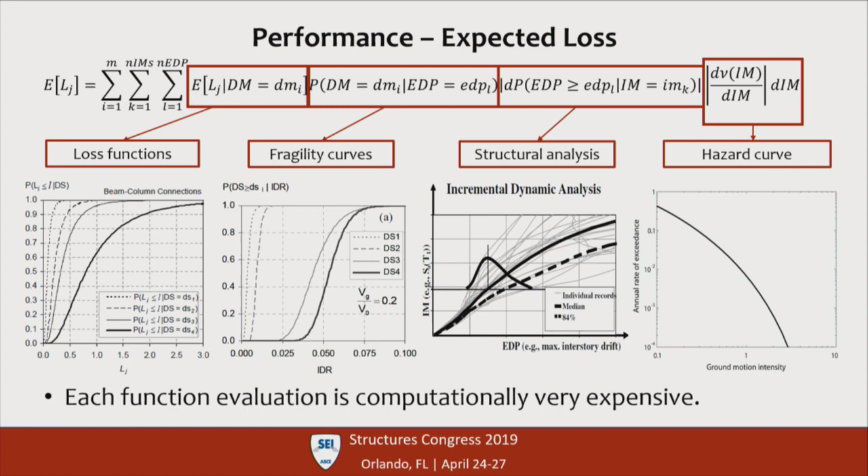So, in order to solve a single objective optimization problem, the engineer could limit the expected losses, or constrain them to allowable values, and minimize the initial cost. And he would get an optimized solution. He would probably get a medal from the client. His boss will not be happy for him wasting time on optimization.

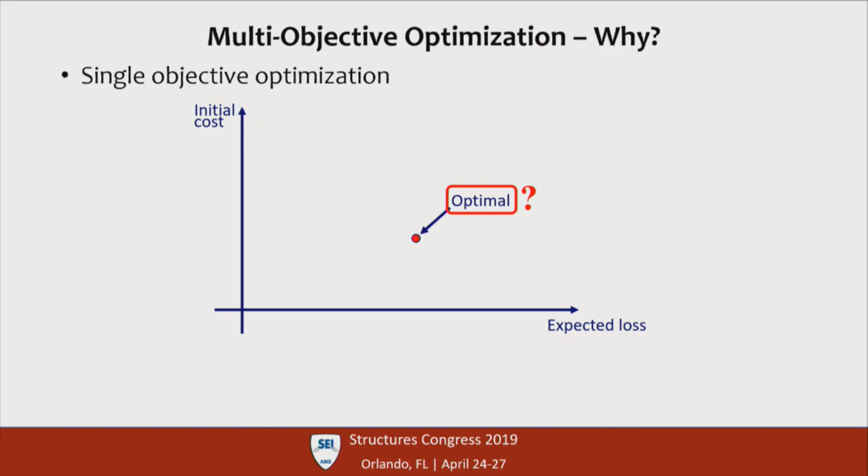But the question is, is this really an optimal or an optimized design? And the answer is yes, for the problem that the engineer solved, this is an optimized design. But what would have happened if the engineer was willing to compromise a little bit on the expected losses and re-optimized the structure? In this case, he would get a new optimal design, and it could be that with a small compromise in the expected loss, he would get a much smaller initial cost. And he doesn't see that because some parameters, like the allowable expected loss, were set a priori.

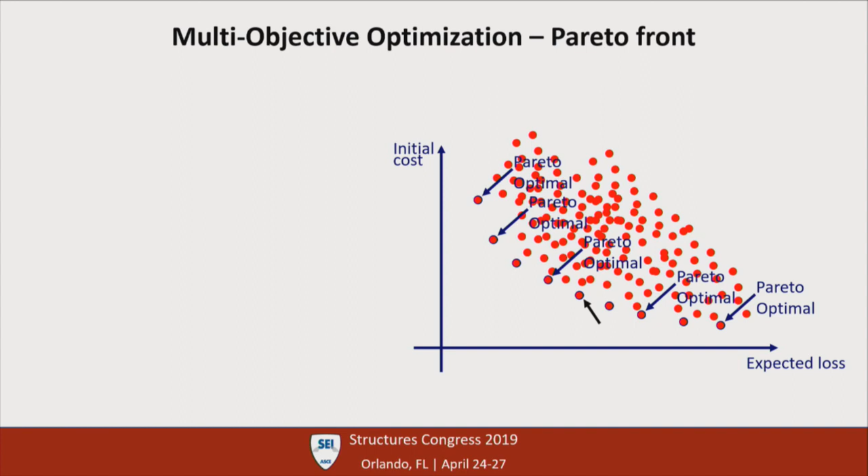And here Pareto comes to the rescue. So if we look at all the feasible solutions on the design space, and we take a look at this specific solution, this is a Pareto optimal solution, since there is no other solution that would reduce one objective without increasing the other, meaning there is no other solution in this shaded quadrant. And the set of Pareto optimal solutions - there is no one optimal solution, but a set of them - is called the Pareto front or the Pareto set.

And when the decision maker has this at hand, he has the whole picture at hand, he can make the best compromise without setting any parameters a priori. So this is a very good tool for decision makers, but it usually involves a very large computational effort. So again, our approach tries to minimize this computational effort so that we could obtain this Pareto front in a reasonable time.

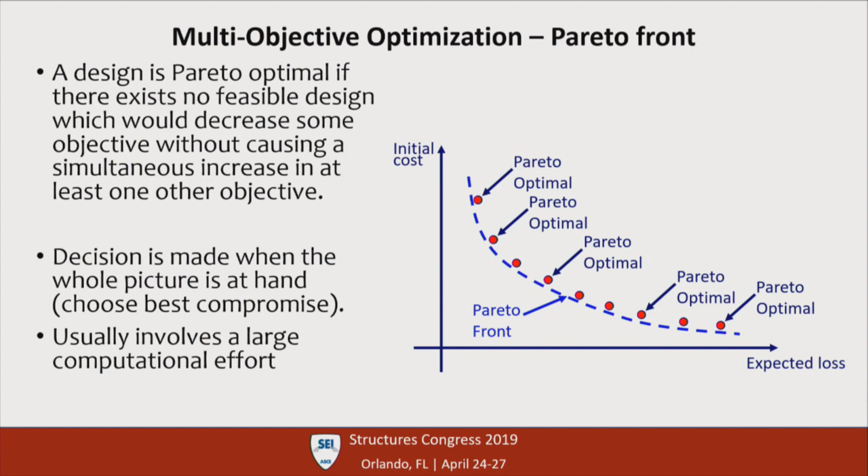So our approach, essentially, we adopted a gradient-based multi-objective optimization approach that was proposed by Izui et al. in 2014. And for the complex functions that we have, we actually use the adjoint analytical method to derive the gradients necessary, and it resulted in a very efficient approach for this specific problem.

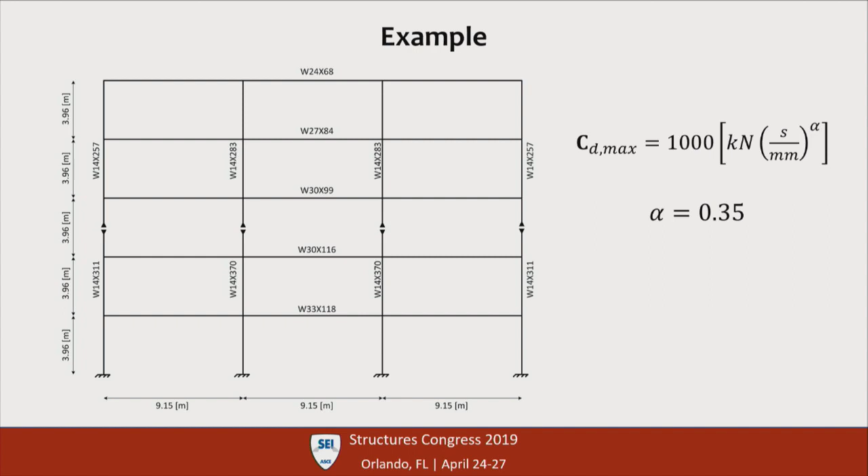So let's take a look at some results. Here we can see a 5-story, 3-bay frame that we wish to retrofit with viscous dampers. We allow dampers to be mounted on the central bay, one in each story or a few in each story. The exponent was taken as 0.35 and the maximum damping coefficient as 1,000 with the appropriate units.

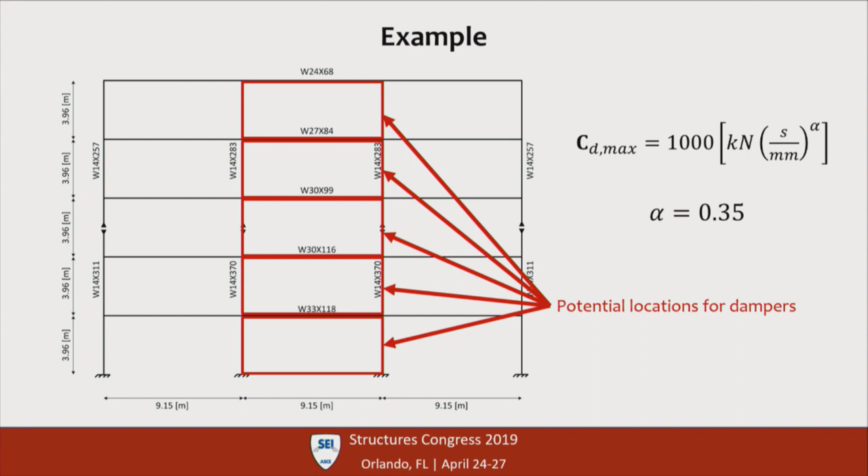And we ran the optimization and we got this Pareto front, and we will take a look at 6 different points on this Pareto front. So the first point, we can see that there is no initial cost, meaning we didn't put any dampers, and there's a relatively large expected loss. On the figures on the right, you can see the damping distribution along the height - zero damping in this case - and the loss per story. We can also see the probability of collapse that is relatively high.

On the figure below, we can see that for the second point, we have a large damper on the 3rd story, and the loss per story is substantially smaller. Note in these figures and in the next figures that the damping distribution between the different points on the Pareto front are very different one from the other.

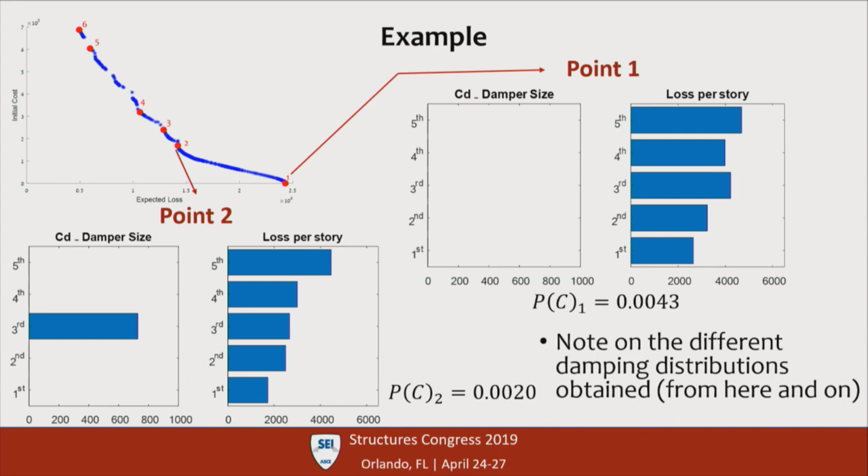So to conclude, we believe that we formulated a meaningful and very good optimization problem for decision makers, because we use multi-objective optimization with functions that decision makers who may not be engineers can well understand, and they can make decisions based on those. Behind this Pareto front, there are actual designs for the dampers. And we did it within a computationally efficient approach.

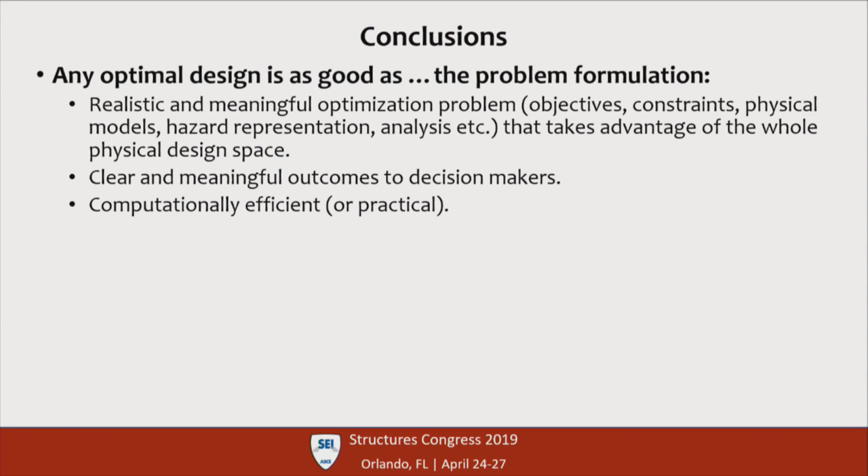One more thing, I would like to acknowledge the Israeli Ministry of Science and Construction for funding this research through the National Building Research Institute. That's it. Thank you very much.

Thank you for having me here. I hope you enjoy it. This is... no, this is not my presentation. This is Ed De Paulo. Would you want to step up?

Can we please change to the optimal design and reinforced concrete structures, please? Okay, this is my presentation. Eugene Kim, who is here, was the associate partner in charge of this project that I'm going to showcase, and Nicolas Gomez was an engineer that helped.

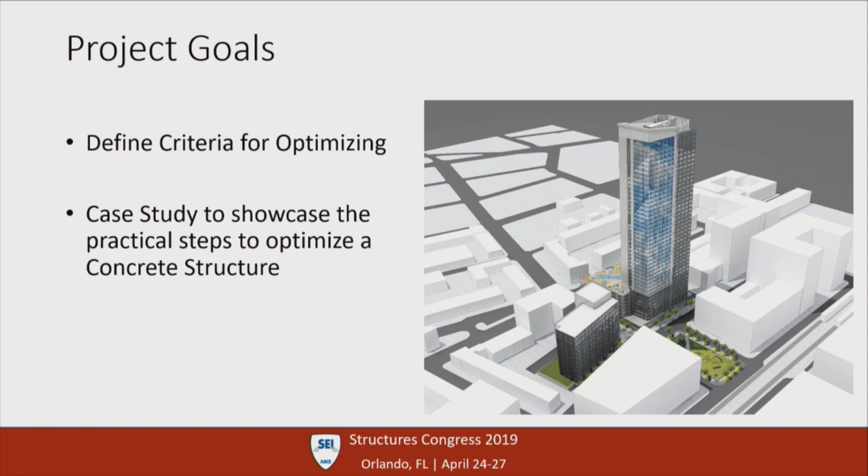We heard a lot about the important thing being to know what we want to optimize, and I couldn't agree more. We're going to talk about the criteria in building design, and then we'll do a case study. What is optimization? We all have an intuitive knowledge of what optimization is, and we all have an intuitive knowledge of what an optimality criteria is. It's the criteria where we judge if we had optimized or not.

In construction, there are 3 basic stakeholders: the owner, the contractor, and the design team. Further, the design team is composed of a number of people: the architect, the mechanical engineer, the foundation engineer, and the structural engineer. And we have nothing in common. The only thing we have in common is we want to get the project built. We want to make it safe, and hopefully sustainable. And then the rest, we're all on our own, with different objectives. The owner wants money, the contractor wants to be familiar with what they built, the architect has to meet the program, and the structural engineer generally is focused on economy.

And this is not new. This has been around forever. This dichotomy in architecture comes from before Christ.

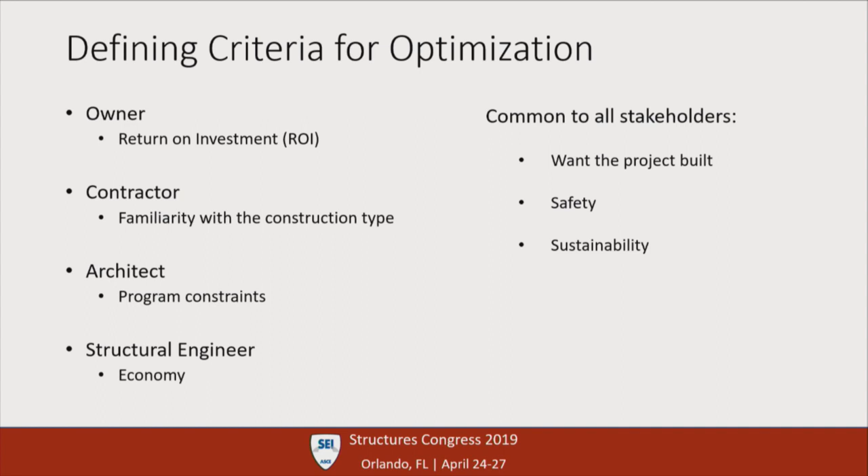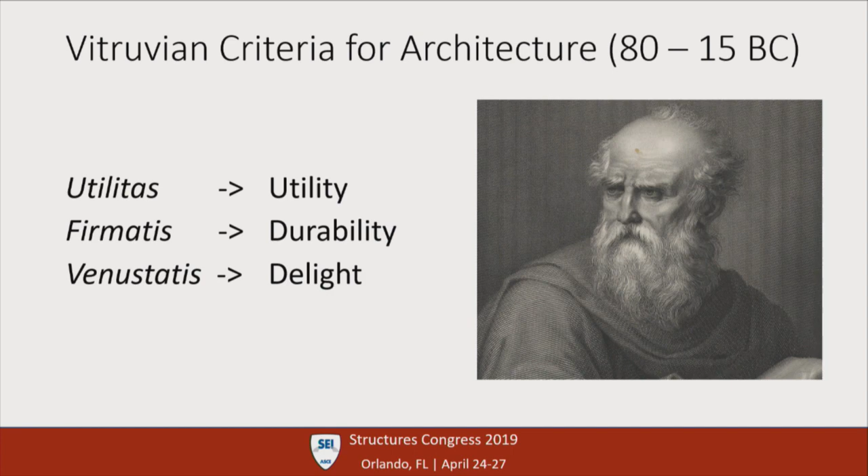How do we optimize the structure? As structural engineers, I think the most important thing is to select the structural system and the material. Once you know what material you want to work in and what the structural system is, you have to work on the different layouts that have a number of components. Then you find what the material strength is, and at the end, we work on the member sizing.

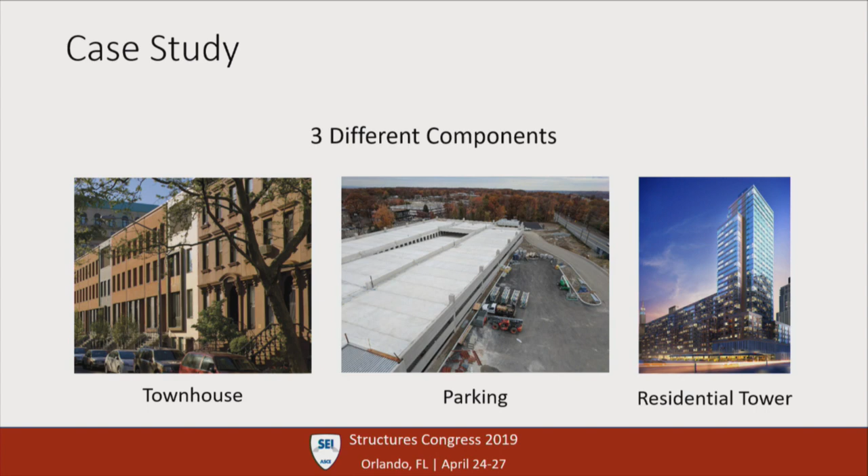In this case study that I'm going to show you, there were 3 different buildings: a townhouse component, a parking component, and a residential component that was a rental. The owner, the contractor, and the owner representative were very experienced; they had done this several times before. They knew that for the townhouses, the best system for them was the Hambro, for the parking it was the precast garage, and for the residential tower it was the concrete flat plate. They knew it because they had the numbers on their return on investment.

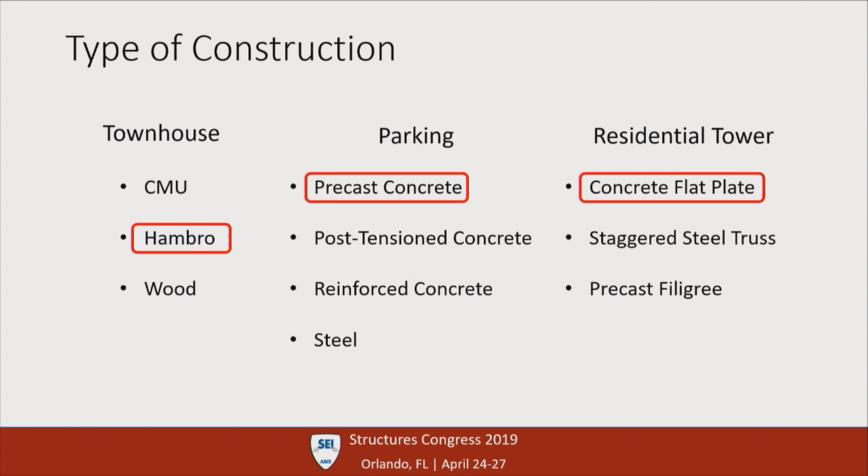So there were 3 different buildings put together on one site, and the massing was something like this. It was nearly a city block, 200 by 200, and this was going to be 480 feet tall — that's to the last floor, not the top of the roof. So it's very short floor-to-floor heights. It's a big project, 670,000 square feet.

This was the most important decision, and it took months: the decision to make all the project in one material only, to make it all in concrete, to have one contractor that will work in concrete so you could give them a huge contract for a better price, so the site could have better logistics, less mobilization, and fewer contractors. This was the hard decision.

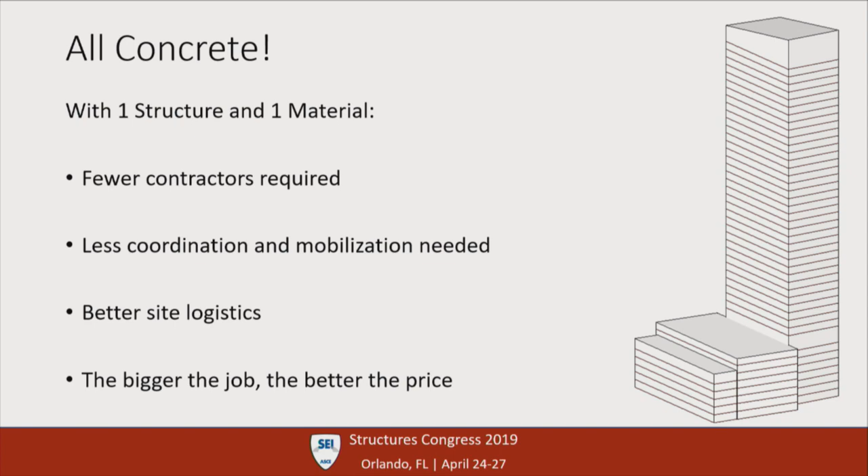The team did not start here. So we did it with one building, without joints. We had to put in fire separation, and we did it with one structure. Just by joining the structures, we saved on the lateral system of the lower buildings. The lower buildings can be supported by the taller building, or if we want to put a lot of structure on the lower buildings, they can actually act as an outrigger or as a point support for the bigger structure.

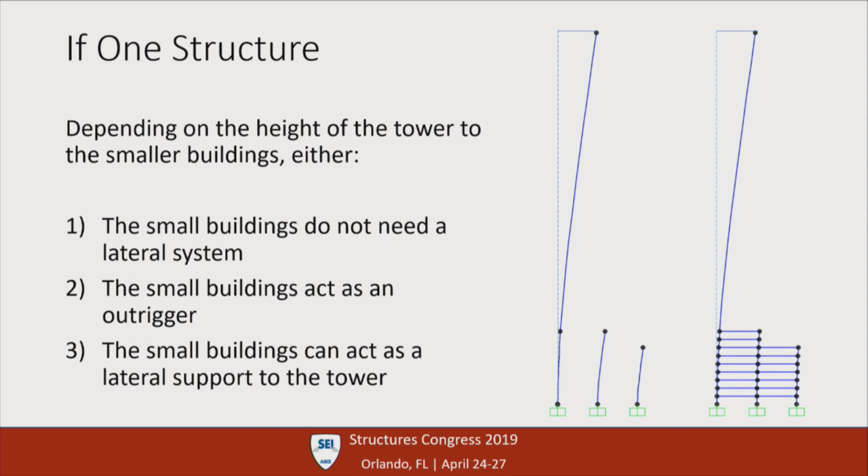The next decision is where do we put the structure? Do we put it on the outside of the tower or on the inside? The external system was rejected. It didn't go with the owner's vision, it was unfamiliar for the contractor, and it impacted the architecture of the apartments. This would have been a very efficient structural system though.

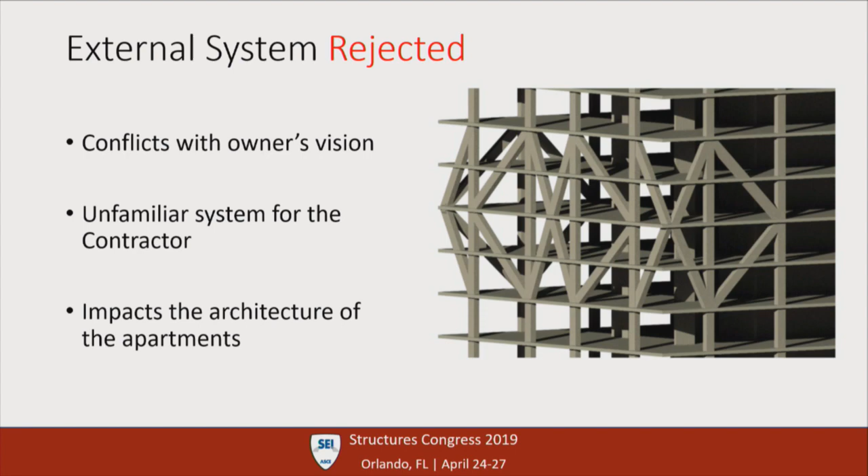So now we go to the wall location. We had a shear wall system. What you see there is that the walls are around the elevators and around the stairs. We want the walls around the stairs in case something happens, so the stair is protected. What is in black is the trash chute. Typically we want walls around the trash chute, but in this case the noise of the trash chute was far away from the bedrooms, so it was not really relevant.

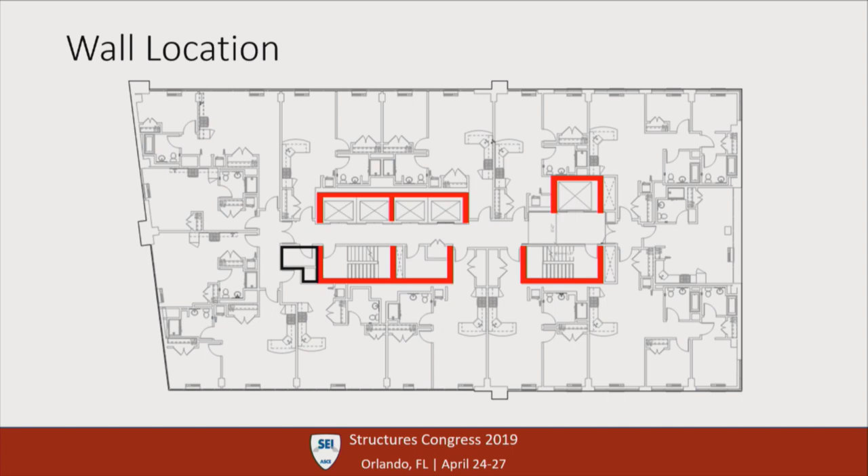Talking to the team, what were the concerns of the team? The concern of the contractor was the link beams. They didn't have a good experience with link beams. They wanted floor plates that were open and accessible to finish the job. The architect wanted as much space as possible for the apartments, and they definitely didn't want noise, and the contractor didn't want to change sizes every 2 floors.

We decided not to put the conduit in the slab. This was a decision of the team. The conduit was put under the slab. This is an example of a link beam of another project.

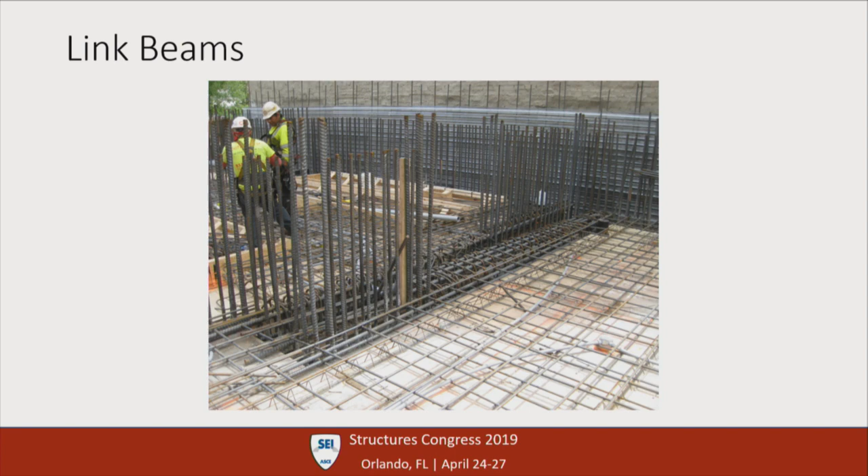The link beams delay the construction and create a lot of coordination problems. What you see on your right is an actual slide of another project, and that's what happened after the mechanical coordination was done. So the link beams many times get very hurt in the process.

So there was a decision that there would be no link beams. Another hit on the structure. This makes the structure more expensive, but the team thought this was an excellent decision.

What you see in blue would be the optimal wall placement if we had walls in the up and down direction of the slide to get some stiffness. But as you can see, the optimal wall placement didn't match the architectural layout. The architectural layout, since this is a rental building, is again based on return on investment. So these were all the possible locations of the walls. In the end, this was the location that was picked, and you can see it's a little bit eccentric, but it has no impact on the architecture.

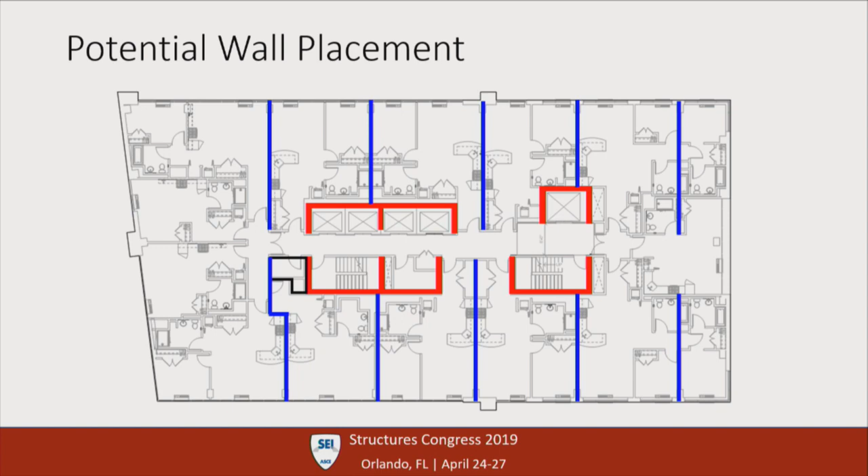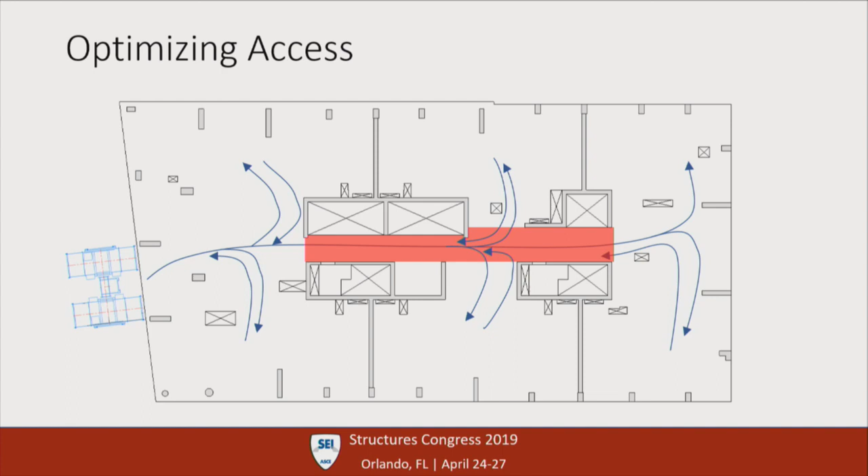The contractor, and what you see there is the hoist, did not want this. They did not want to have all the flow of material for the site go through the center corridor. What they wanted is this. So we designed this: we put staggered holes on the shear walls, so you wouldn't need link beams to give the contractor access to the floor.

The owner was not familiar with this approach. The owner realized he was not getting a break price in the concrete, and he had to pay more to the finisher because now he had to fill in a number of fire-rated walls.

So this was rejected. When you do one of these buildings, what you want to do is increase the tributary area of the core as much as possible, because you have a lot of concrete on the core, and then you reduce the uplift too. So we moved all the columns away from the core, and you can see on your right that some of the columns we made longer to keep with an 8-inch slab. So this was the end result, the tributary area for the core.

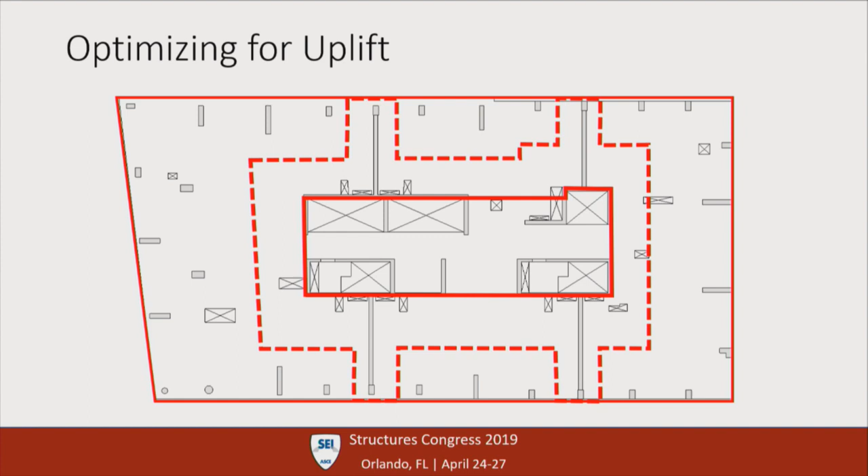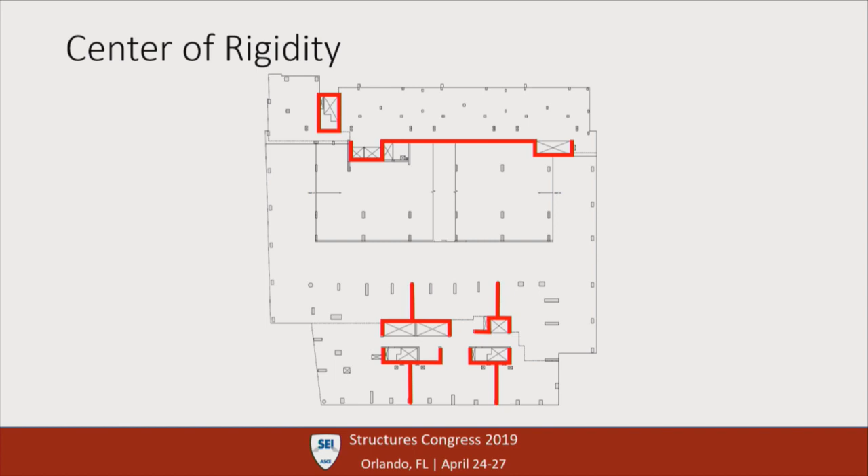Finally, we come up to what we really want to do: control the drift and the period. In lower buildings, we have to satisfy the drift. In taller buildings, what is important is the period, because the period gives you the forces. So this building had a wind tunnel test, and we were trying to optimize the period to reduce the forces.

What Bill LeMessurier saw many years ago is that a structure is optimal whenever you move it around and it contributes to the deflection the same amount. The way to do this is through the principle of virtual works. You have two independent sets of forces and displacements in a building, you compute them, and if the force of one and the displacement of the other equals the internal energy of all the other members, this is very easy to do computationally, and this is the method we use.

In addition, for taller buildings, a disciple of Bill LeMessurier, Richard Henige, found that you can also use virtual work to optimize for the period when the two sets of forces are the inertial forces.

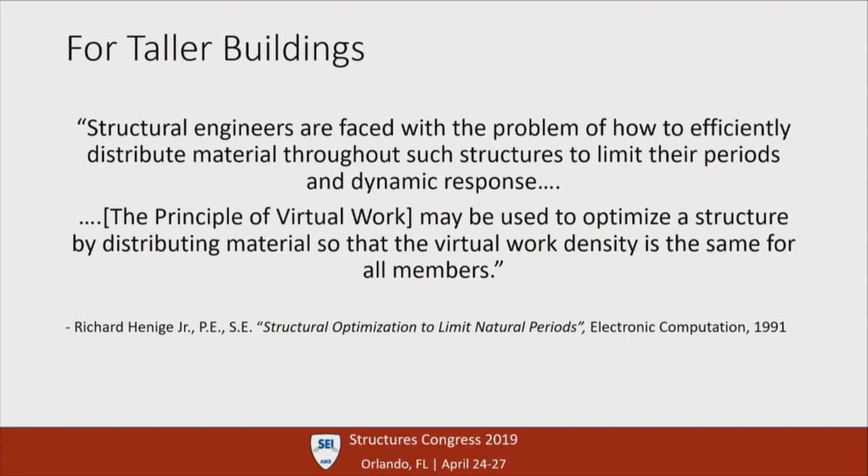So we did the member sizing. We did it with ETABS. ETABS has a routine that asks you for the relative strain energy of all the members, so you can go there, and then you can pick and select the members.

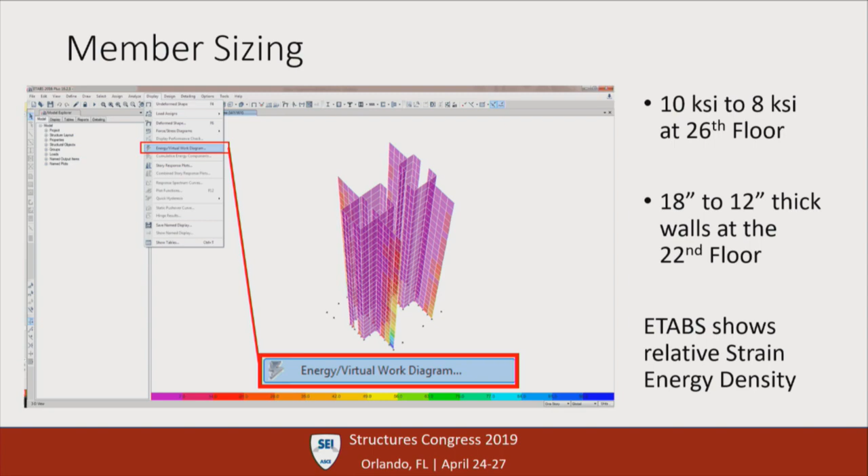This project took 7 months to build. We did a 2-day cycle. This is 2.5 floors a week for 38 floors. The bottom floors, which are 40,000 square feet, take approximately a week. You cannot pour more than 20,000 square feet a day, every 2 days, at least in our experience. So the minimum for the superstructure would be 6 months. This took 7 months, including going through winter and through the holidays.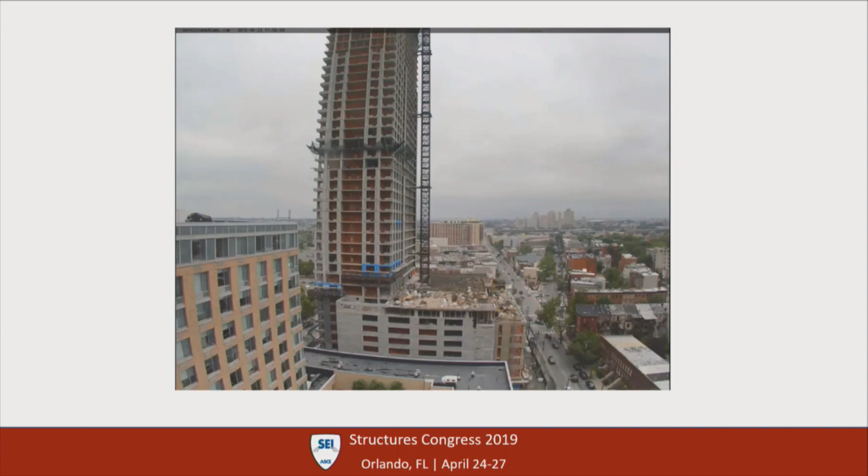We asked for link beams. We didn't have link beams. We asked for the walls of the shear walls to be aligned so they can work. We didn't get that, we got offset walls. The contractor asked for holes. They didn't get that, they got a single hallway.

And finally, we did the column placement and the member sizing. You can see that you have to compromise where you do optimization. It's a team, and what is good for you may not be good for the others.

Listen to the stakeholders. If you remember something about this presentation, this is the most important thing. Thank you.

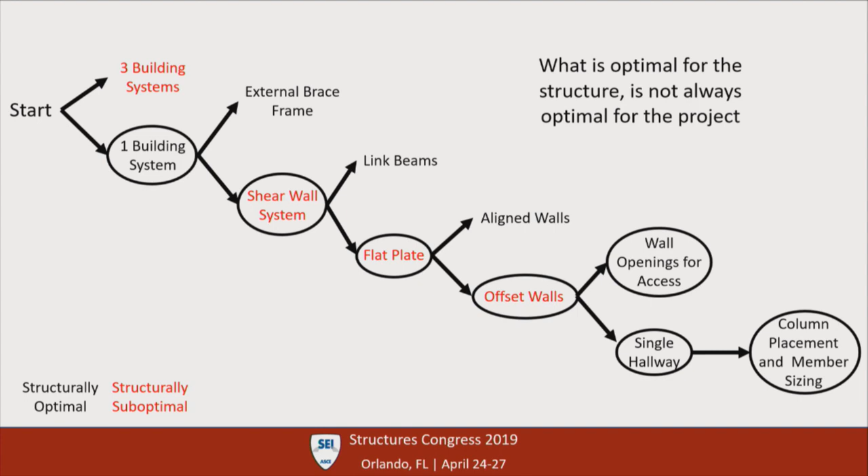You all learned it either in sophomore or junior year of college. It's relatively straightforward: you have a real force system and a virtual force system. The way it works is that the deformation is the sum of P times delta L, where P is axial force, and the M bars times the change in rotations, with those being PL over AE and ML over EI.

You see the bottom equation, number 1: if you use a virtual force of 1, your deformation is the sum of the P P-bar L over AE, and if you have moments, you include M M-bar L over EI, and if you have shears, you can include those, and if it's three-dimensional, you can include MX and MY. You can include as many as you want as long as you take care of them.

What I'm going to show you today, because of limited time, is very simple. It's a braced frame, or it could be used for a truss, but for today, a braced frame. You have to assume all the other optimizations have already taken place. We've decided that you have bracing on these column lines in the building, and you have outriggers and belt trusses at these floors. You have your geometry; I'm not trying to optimize that.

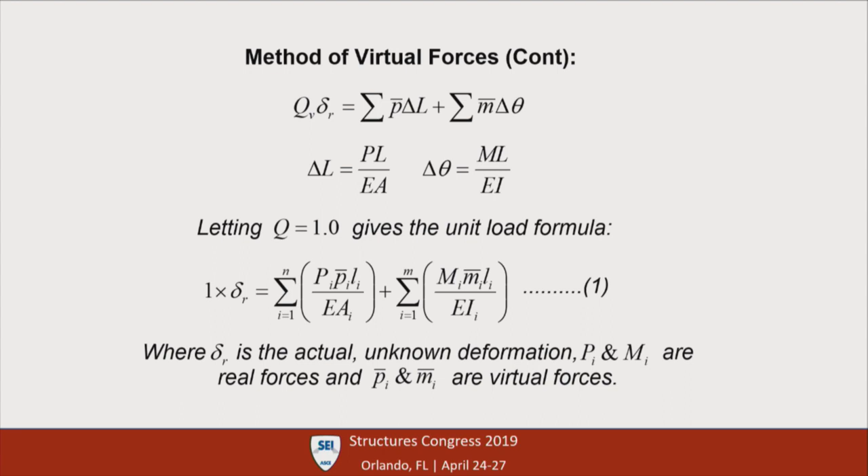We'll call it phi of xy. And you make this equation where capital F is equal to small f plus lambda, which is the Lagrange multiplier. You set the partial derivatives of x and y equal to 0, and you solve for the unknowns. You're going to be pretty amazed at how simple this is.

This works for any number of variables. I'm showing you x, y, z here, but as you can imagine, in a 1,000-foot tall building, every diagonal brace, column, outrigger truss piece is a variable. There's A1 through A2000, and what you want to do is optimize them.

The way we did it in the old days was we did the accounting spreadsheets. We multiplied P, P, L, and divided by E, and we looked in the column to see which ones had the biggest number. That was the biggest contribution of drift to the total answer.

So let's do this. We have the small f function, which is the density times the area times the length. It's basically the volume of the element. And I'm going to add them all together, as many as I have.

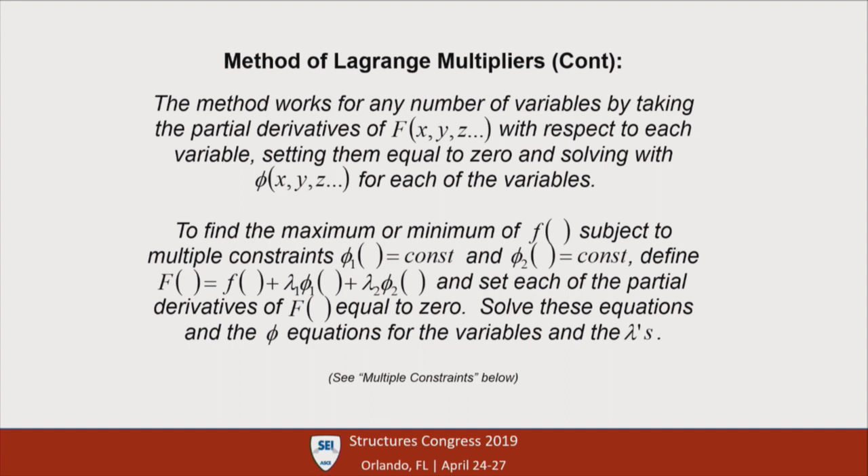The constraint, in this case, is the definition of a displacement at a given point, and that's the virtual force method. The sum of the PPL over AE is equal to some number. It's a constant.

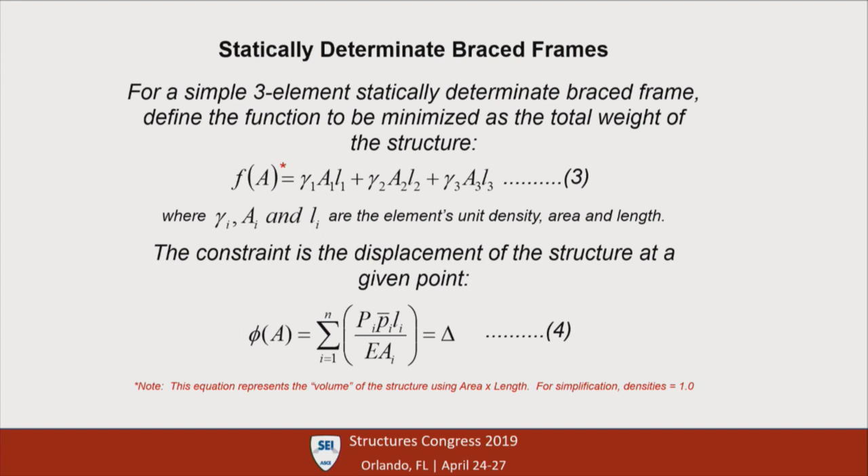And when you fill them all in, you get the capital F equation. Then for an optimized structure, you take the partial differentials of each of the functions in relation to each area. What's important at the bottom, something to remember after the next slide, is that the Lagrange multipliers times the partial differentials has to equal 1.0, or should equal 1.0.

And if you fill in all the numbers - and I'm sure you can somehow get a copy of this PowerPoint, if you want to email me I'll send it to you - you fill in all the numbers, and the bottom equation 6 is it.

The Lagrange multiplier times the PPL over A squared E. The A squared comes because you took a partial derivative in a step before. And that means that the Lagrange multiplier times the strain energy density of the element is equal to 1. When that occurs in every element on the project, you have an optimal structure.

Optimizing, again, volume and hence area. I'm going to do this hand calculation. Very simple, 3-element truss with a 100 kip load on it.

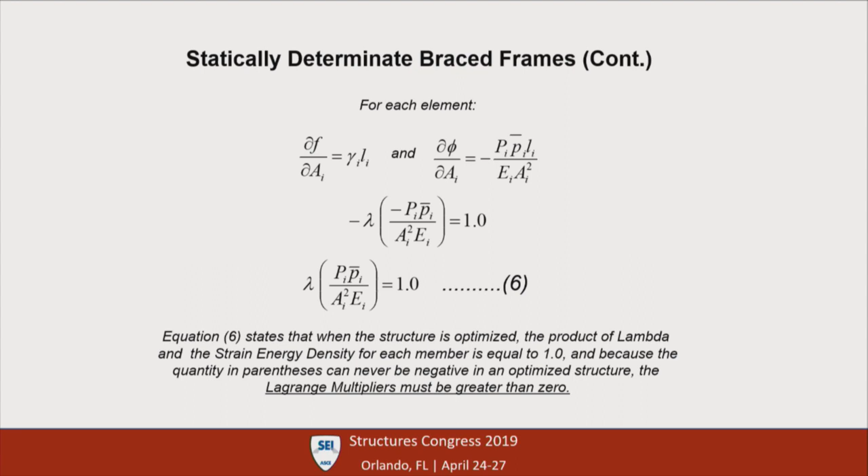You see the dimensions. The Excel spreadsheet printout shows you the P, which is the real load, the virtual load lowercase p, which is based on a 1 kip load, and the length of each element in inches. I plug all that information into the equation that I showed you before for capital F.

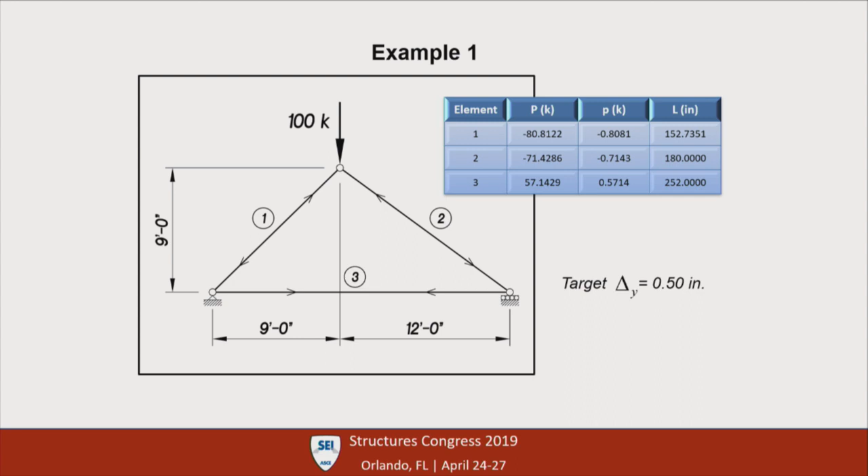And now that's a small little problem that you do by hand with a pencil and a calculator, and very simple to use, right?

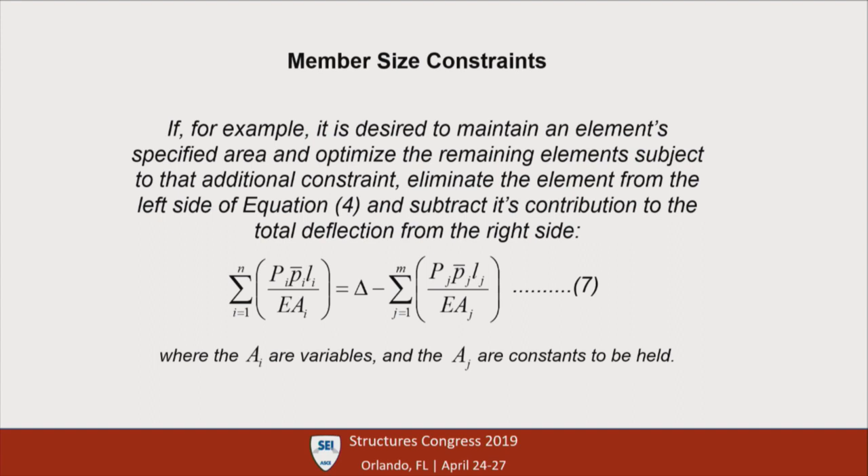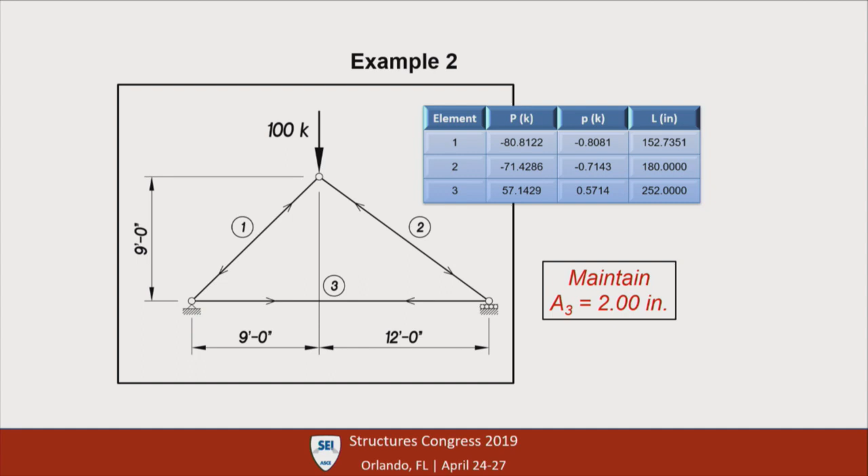So I do it again, and I say in this case I'm going to take A3, hold it constant, and run the same thing. You can see it's the same forces and lengths. I do the same equation, leaving out A3, get my partial differential, and I can relate A2 to A1. I put it in the equation. On the right-hand side, I took the half inch that I wanted and subtract the strain energy contribution from A3. I subtract it from the half inch, and I get the A1 and A2 values across the bottom of the screen. You put them in this spreadsheet, and again, the sum of the third column is half inch, and all the numbers on the optimized elements in the right-hand column are 1.

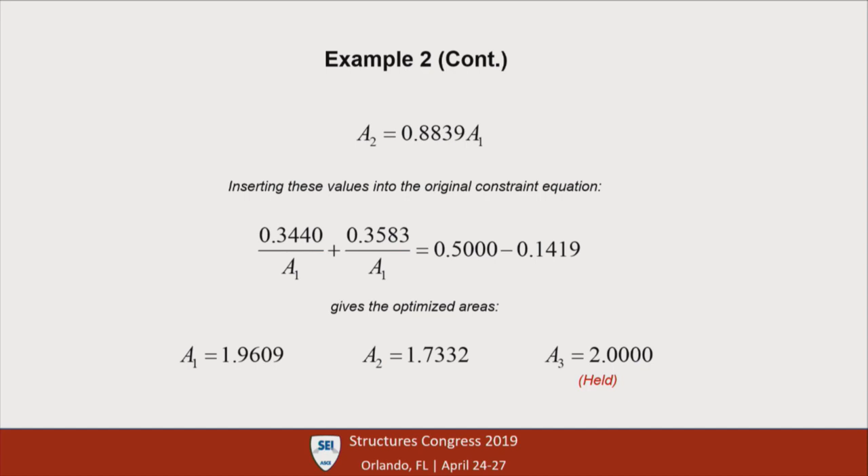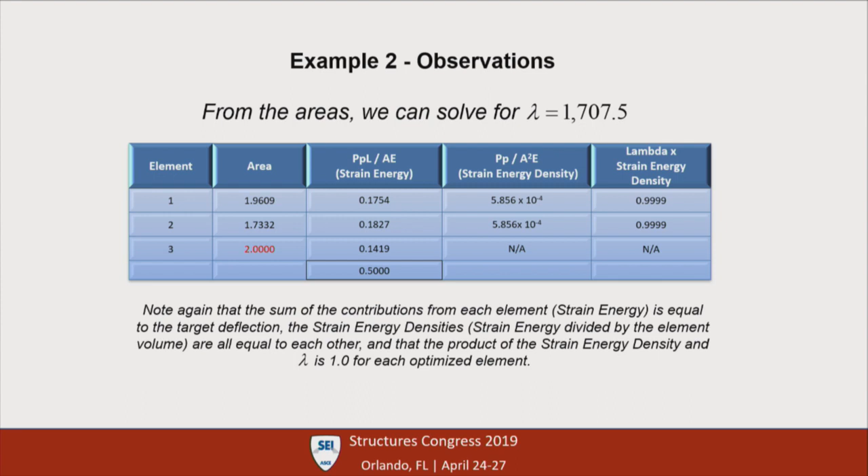Now, I showed you this in very simple terms on a statically determinate frame with axial force. As I said at the beginning, it's valid in 3D. It's valid for moments, it's valid for shears, and it's valid for all of them at the same time. The key is to be able to find a way to relate the moment of inertia to the area. I don't have it in the presentation because of lack of time, but you can go into the steel manual and plot and do a linear regression of every W size in the manual. For W14, you can come up with an equation that relates I to A. It's pretty close, amazingly close. So you substitute I for A times this factor that you work out, and now you can do combined axial and moments.

The last thing I'm going to show you is that for statically indeterminate frames, because I've only shown you statically determinate, the process is exactly the same. But because the forces in an indeterminate system are dependent on the stiffness of the system, as you change the areas around, the forces are going to change. So you necessarily have to iterate. However, using the same method, these are the iterations. The volume of the structure in iteration number 2 hit 186, and in iteration number 3 didn't change, which means, even though this is only a 3-story, 1-bay structure, it converges very, very rapidly. As a matter of fact, those of us who use this in our practices can tell you that if you do it once, even for a 1,000-foot tall building, you're real close to where you want to be, and there really isn't much need to go much more than that.

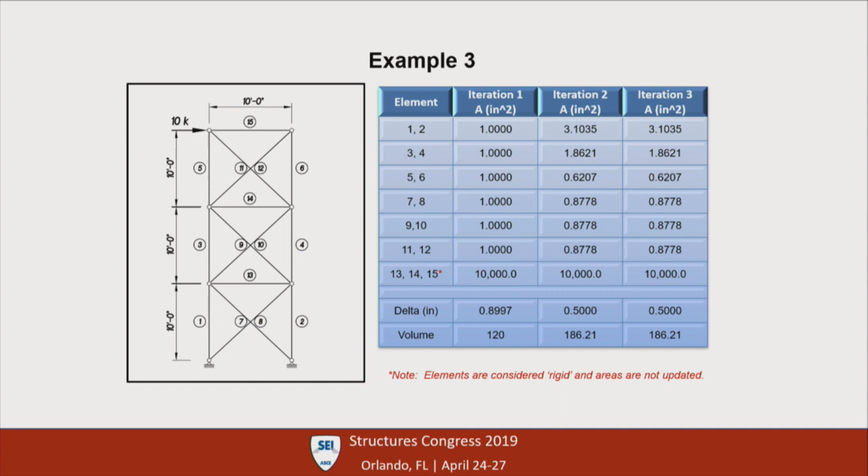Thank you. Hello. Today I will talk about optimization-based design of nonlinear moment-resisting steel frame under seismic load. First, I want to acknowledge the Israeli Ministry of Science, Technology, and Space for the financial support in this research.

So I want to open with a question: how to design? What is the best way to design a new steel moment-resisting frame subjected to seismic load with performance constraint? Using conventional design tools such as force-based design or direct displacement-based design in many cases might lead to inefficient, costly design, in particular when an irregular structure is to be designed. A possible solution we propose for this problem is to utilize the optimization-based design approach for this task.

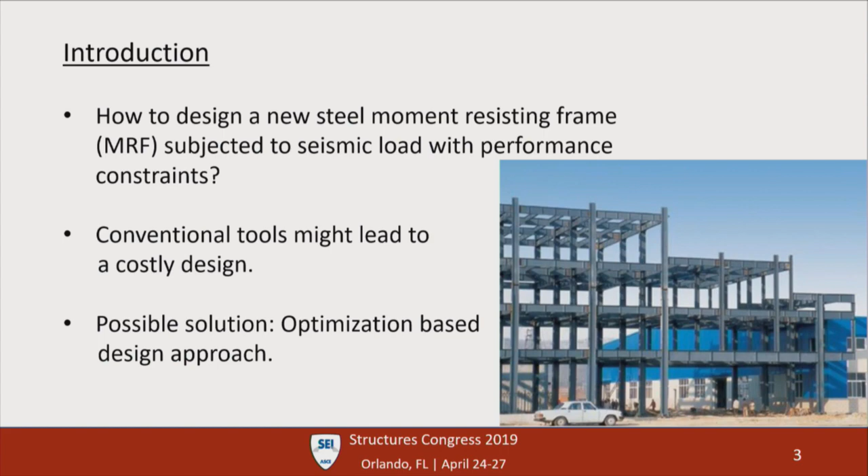In the literature, we can find a number of works that use optimization methods for this problem. Some utilize static nonlinear analysis tools such as pushover analysis. Others use heuristic optimization tools, genetic algorithm, or simulated annealing. Heuristic optimization tools are very popular in the field of structural optimization and can easily be modified for a more reliable analysis tool such as nonlinear time history analysis. But on the other hand, they are very computationally demanding. Also, analysis redesign is used for this problem. Analysis redesign is a very practical and easy-to-use analysis tool, but on the other hand, it's not a formal optimization tool.

In the presented work, we will focus on the gradient-based optimization approach. Gradient-based is known as a very efficient optimization tool. It is a formal optimization tool, and the response of the structure will be evaluated based on nonlinear time history analysis.

The objective of this work is to develop an efficient gradient-based optimization methodology for the design of new steel moment-resisting frames subjected to earthquake with performance constraints. The contribution of this work is that the proposed methodology will be able to solve an irregular, large-scale, real-scale frame with a large number of design variables at reasonable computational cost.

The problem formulation for the optimization process: the objective is to minimize the total volume of material in the structure, in our case the total volume of steel. Then we have the constraints. The first is the performance constraint, the interstory drift, where the peak interstory drift at each story is limited by a predefined allowable interstory drift.

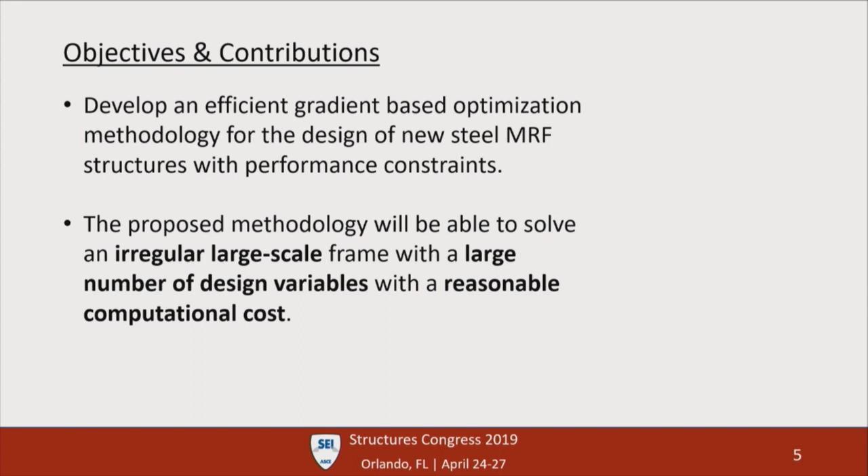We also consider the strong column weak beam and column size criterion. The response of the structure during the earthquake is evaluated based on the solution of the nonlinear equations of motion under the load of an ensemble of ground motion records. The cross-section properties for each member are selected from a standard predefined set of steel tables, where the plastic modulus W represents the cross-section properties.

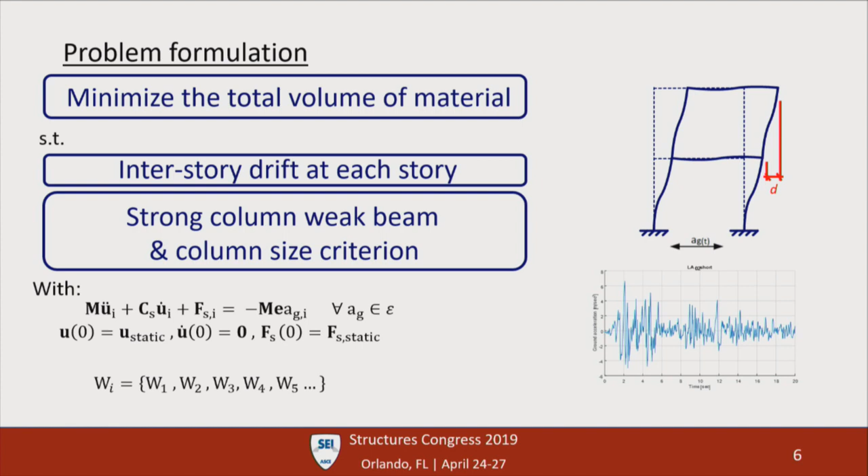The solution scheme for the gradient-based optimization method is as follows. We start from an initial solution, initial design. Then we evaluate the response of the structure, first by a static analysis tool to consider the gravity load, and then we use the nonlinear time history analysis. Next, we evaluate the sensitivities of the objective function and the constraints with respect to the design variables.

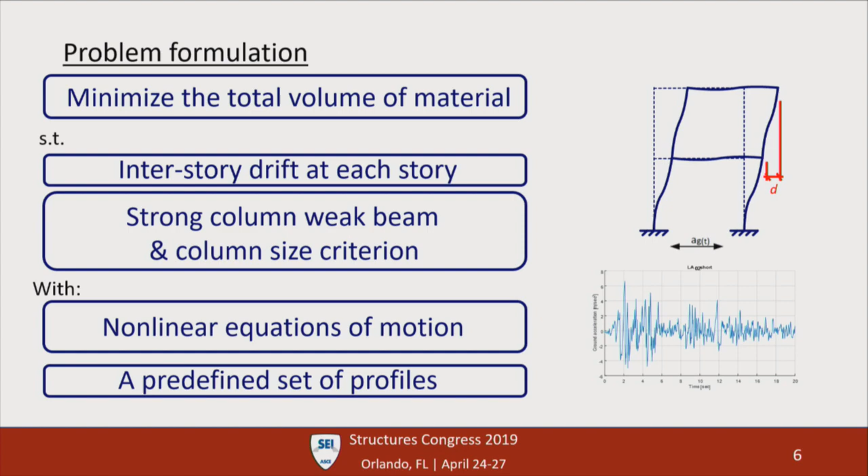Next, we use the sensitivities to approximate the problem as a subproblem. In this case, we utilize sequential linear programming approximation, then solve the optimization subproblem, and repeat this process until the problem converges.

I will start with the nonlinear time history analysis. We have a 2D frame model under the load of deterministic ground motion. At each beam-column connection, we have 3 degrees of freedom: horizontal, vertical, and rotational. The response is given by the solution of the global equations of motion. We use the Newmark beta time stepping integration scheme. Because of material nonlinearity, we also use the Newton-Raphson algorithm, and we consider the P-delta effect via the geometrical stiffness matrix.

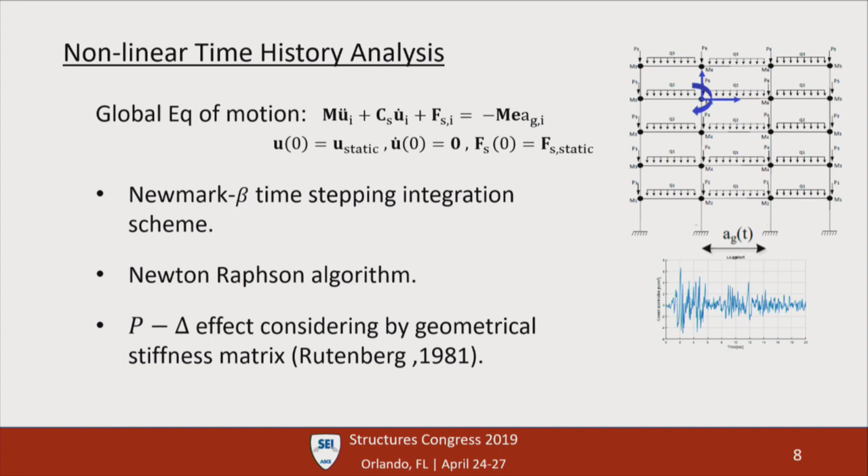For each member, beam or column, in the model we use a force-based element as presented by Spacone. It's a 2D Euler-Bernoulli beam element, also used by Pollini, Lavan, and Amir. We take into account the interaction between bending moment and axial force. At each element we have a number of control sections, and for each control section we use a differential equation to describe the relation between moment and curvature. After successfully evaluating the curvature at each control section, we can evaluate the beam end rotation using numerical integration.

Now I will move forward to the sensitivity analysis. In order to utilize an efficient gradient-based optimization solution scheme, we must first formulate the objective function, the constraints, and the design variables in continuous differentiable form.

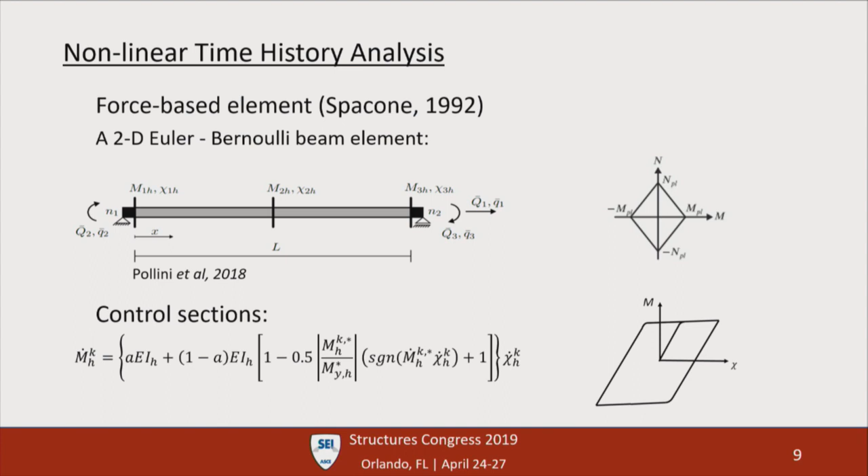I will start with the reformulation of the design variable, where we have a predefined set of profiles: W1, W2, and so on. We reformulate the plastic modulus W of each member using the vector X of continuous design variables, where each X is defined in the interval between 0 and 1 as a continuous design variable.

Now we want to evaluate the gradients of the objective function and the constraint. The objective function is an explicit term of the design variable X, and therefore we can evaluate its gradient explicitly without any major obstacle.

The performance constraint is much more difficult to evaluate, because the peak interstory drift is given by the solution of the nonlinear equations of motion during the earthquake over time. Therefore we first rewrite the original non-differentiable constraint term as one aggregated differentiable term, and then we utilize the adjoint method to derive the gradient of the constraint in an efficient way.

So in this stage, after we successfully evaluate the gradient of the objective function and the constraint, we can use the gradient-based optimization solution scheme.

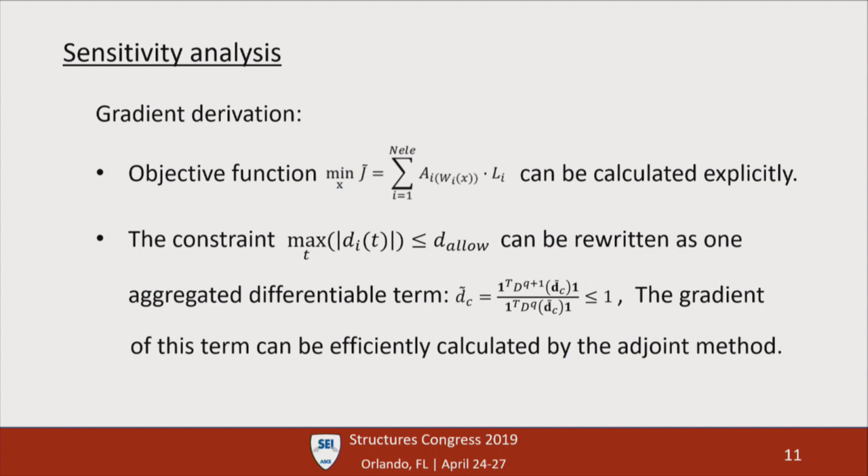For this reason, we adopt the discrete material optimization function, DMO, and we added the parameter P, known also as the penalization power. The concept of this DMO function can be illustrated by a more simple function, the SIMP function.

In the figure, the x-axis represents the design variable X, the y-axis represents the plastic modulus we consider for the analysis. In this way, for a given value of P, binary values for X are preferred, and the optimization drives forward a discrete final design that is practical and compatible with standard steel tables.

Now I will show two numerical examples. The first is a simple example of a two-story, one-bay frame under the load of the El Centro ground record.

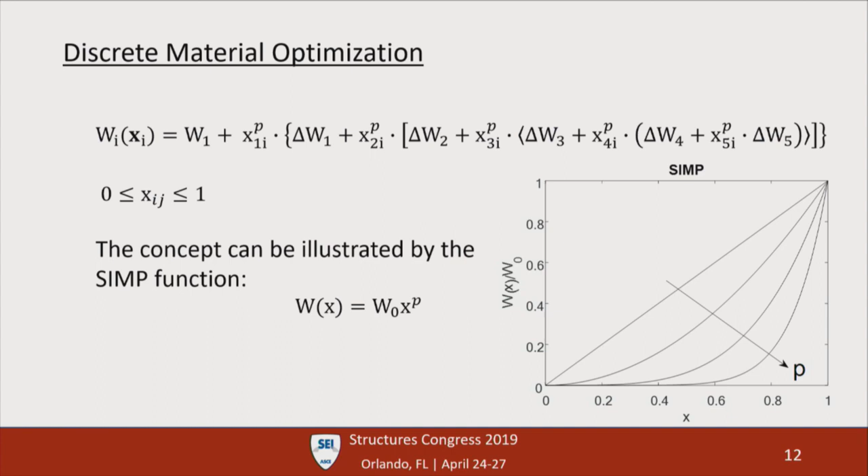In this problem, we have two design variables: the plastic modulus of the columns, and the plastic modulus of the beams. We consider the European standard steel table, IPB type for the columns, and IPE type for the beams. The interstory drift constraint of each story is set to 1.5% of the height of the same story.

Here is the contour map of the problem. The x-axis is the plastic modulus of the columns, and the y-axis is the plastic modulus of the beams. The red lines represent the performance constraint, the interstory drift. The black line represents the objective function, the cost, and the blue crosses represent all the possible discrete combinations for design based on IPB type for the columns and IPE type for the beams.

All of this area is not feasible because the peak interstory drift is larger than the allowable interstory drift. The optimal discrete design is IPE 300 for the beams and IPB 260 for the columns.

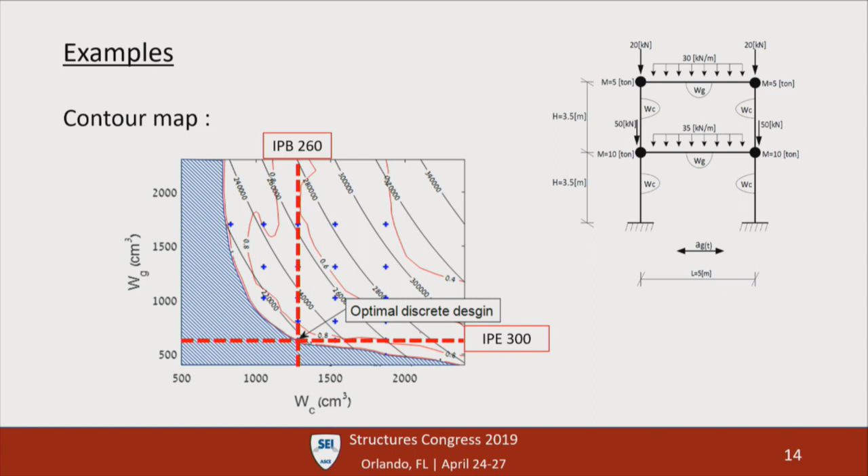Now I will show a real design case, a 9-story setback structure, an irregular structure, also under the load of the El Centro ground record. In this problem, we have 53 different design variables, 53 different types of elements in this structure. We consider the European standard steel table, and the interstory drift constraint is set to 1.5% of the height of the same story.

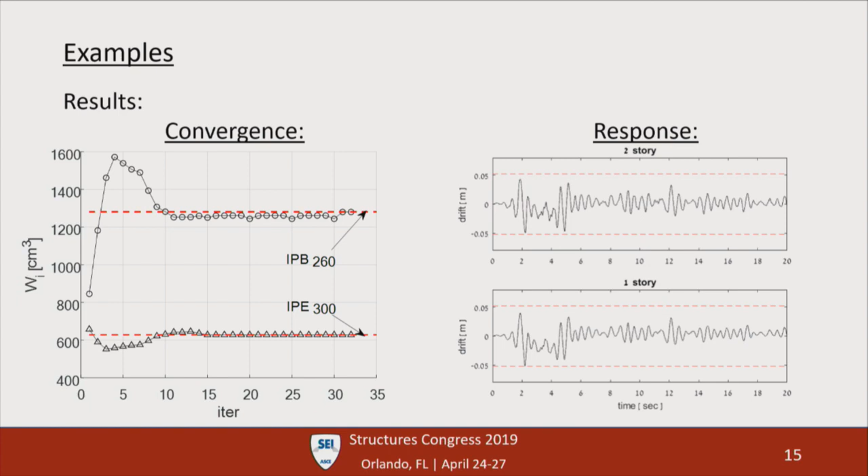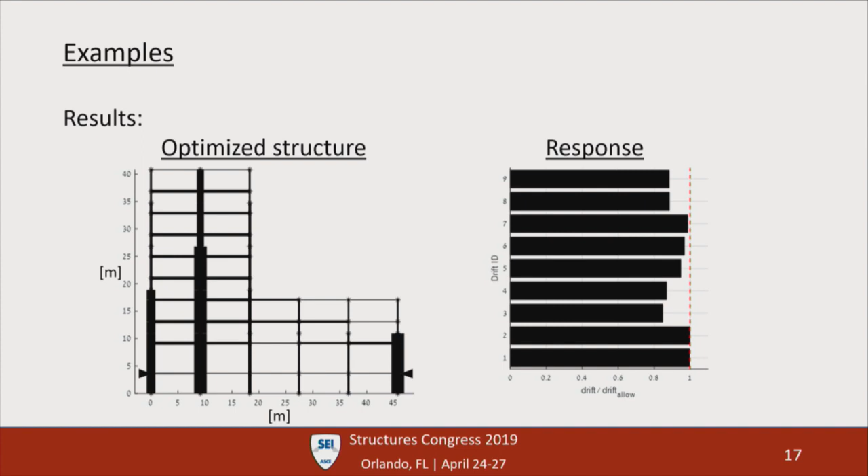To conclude, the numerical results showed how the proposed methodology successfully solved realistic design cases, large-scale problems with a large number of design variables, as the 9-story structure successfully solved, irregular moment-resisting frames, also as the 9-story setback structure successfully solved. Another important issue is the efficiency of this method from a computational point of view, and the small number of function evaluations required to achieve the optimized structure.

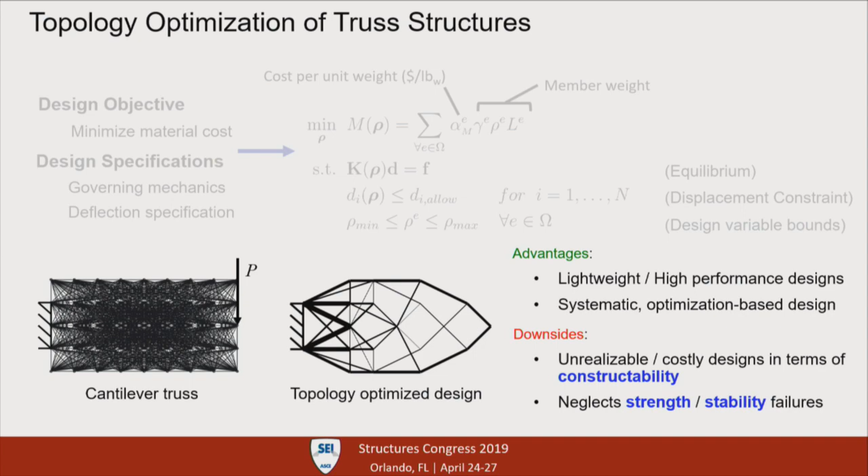Another one we've looked at is custom member sizes. Obviously we can't pick any cross-section — maybe it has to be custom made, and that comes at a pretty large cost premium. Oversized members may come at a cost premium too. If you look at our structure here, we have very large members near the root of that beam, and maybe those incur a cost premium. So can we actually drive the optimizer to choose more standard section sizes or avoid things like oversized cross-sectional members?

And the last one there is repeatability. That truss actually has almost every cross-sectional area different — every member has a different section size. It's symmetric, so we're talking about half of the structure here, but almost every member is different, and that's obviously very undesirable. It's very complex, not only in the acquisition of those members — maybe we can get volume discounts if they're all the same size — but also just managing the assembly of all those different beams. So can we encourage the optimizer to repeat cross-sections?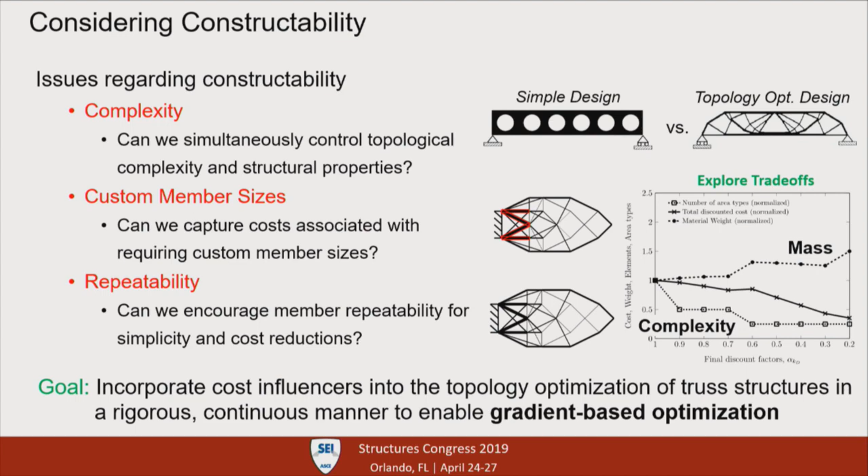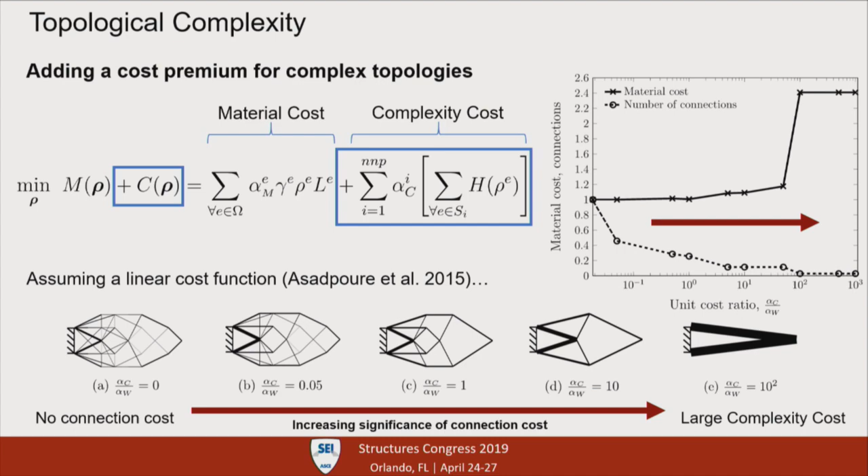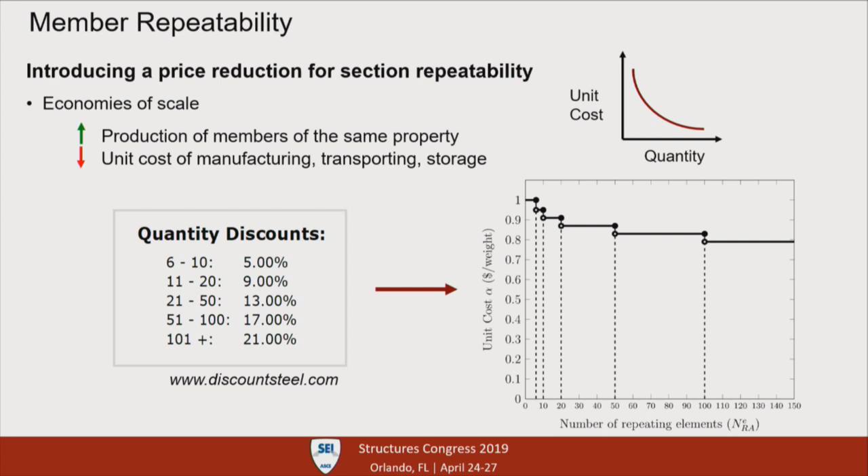So RA is kind of adjusted cost now. This calculation is somewhat complicated, so I'm not going to go through every term, but basically the idea is very simple. When I have a given area, I see how many members have a similar area - that tells me the discount. And then I can sum those up and go to the next element with a different area. The key is it's a continuous function, a function of my input discount curve. And then the optimizer will work on that.

And when I do something like that, you see things like this. So this is just considering repeatability and discount curves. If we don't have any discount for repeatability, we get that structure I've already shown on the top. And then as we encourage repeatability with discount curves, you see more members being added and you see less variation in the line thicknesses. The number of members with different cross sections is going down, and that's shown on that plot on the right - that bottom curve is the number of different cross sections normalized against the original number. And of course, as we do that, we lose efficiency.

Again, as we require the optimizer to repeat section sizes, we're going to lose structural efficiency and have more material cost, so that top curve is moving up as we do this. Now, in the extreme, if we have major discounts for buying lots of stuff, you end up with a structure that uses all the same section size, right? That very complicated one on the bottom.

Obviously, we would want to take our previous complexity constraint and add it to this to balance both of those things. So one thing I'd like to say here is we're not imposing repeatability, we're not forcing the optimizer to use repeatable members. That would be much easier as a constraint. Rather, we're giving some cost benefit to doing it, and letting the optimizer navigate whether it's worth it to have those repeatable sections.

And then one other example is the one on the right. I trimmed down what I was going to show, but the one on the right is another example of custom sizes. So if we want to use non-standard sizes or really large structural section sizes, oversized members for example, we can turn on cost premiums when those cross-sectional areas hit those values. So that top curve there is just an example of a cost premium kicking in when our area reaches a certain value.

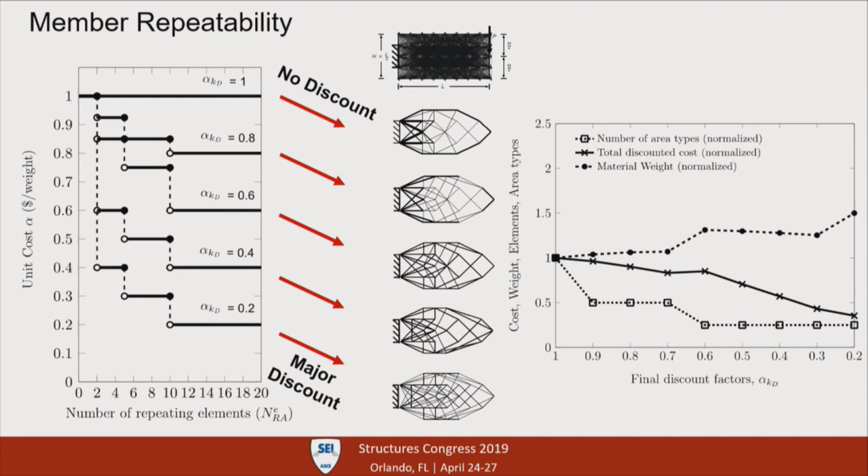And the picture on the bottom right is a very simple truss. If we're allowed to use whatever cross-section we want, we get a large 3-bar truss with large members. And at some point, if those large members become too expensive, you see it design a redundant structure with smaller members. So again, trading off complexity, or in this case, custom sizes, for material efficiency.

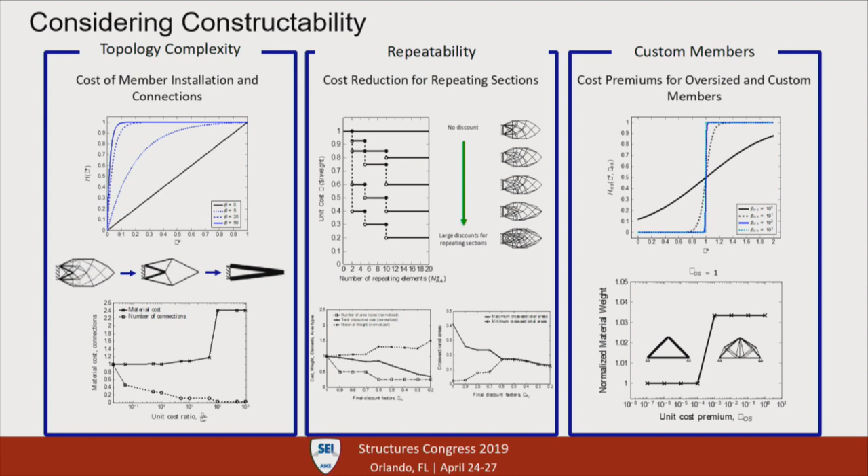And this is fundamentally because we're using a ground structure approach. We have very, very tiny members sort of stabilizing that system, but in reality, it's not actually going to be stable when we remove them. So the key is, how do we get these metrics into the problem formulation?

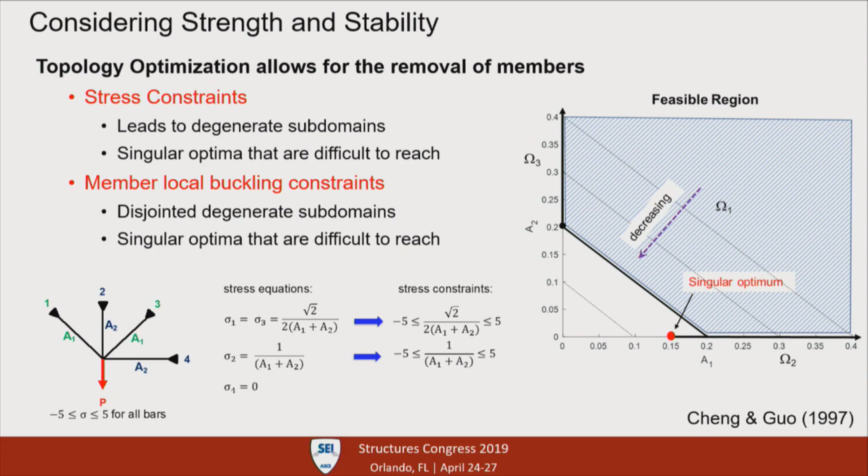The idea is instead of using cross-sectional areas as your independent design variables, which has this issue where as A vanishes, constraints start to blow up, rather have cross-sectional areas as well as structural response, displacements, forces, actually also be independent optimization variables. And now rather than solving an explicit KD equals F style problem, the optimizer actually has to solve it for you. It's all now solved inside the optimization.

D, F, and A can move simultaneously, so A and F can go to zero together, and you don't get a stress spike that way. The other nice thing about this is the gradients are trivial. You can't see the equations, but they're all linear expressions in those variables, one nonlinear expression, so they're very easy to compute the sensitivities for gradient-based optimization.

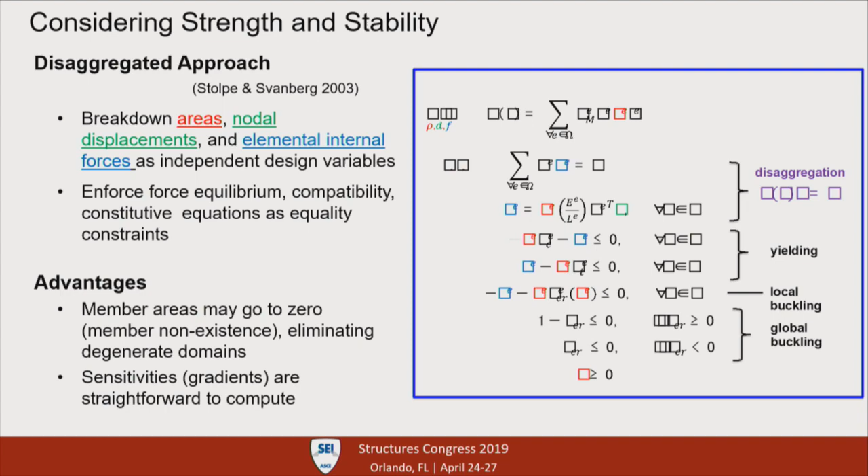So I'll wrap up and conclude that topology optimization is a really nice tool for finding new structural solutions. But the catch is you have to have the things you care about in the formulation. The idea of optimizing and then cleaning up and imposing your biases after the design process can actually lead to very bad solutions. We'd like to get those things actually into the optimization formulation.

Whether it's things like constructability, or strength and stability constraints, or behavior in the post-elastic regime—all of these things have to be bundled together. They all have to be going on simultaneously. That's our goal. Unfortunately, we didn't get it done in time to show you today, but the goal is to have them all working together so that we can solve these problems with all of these things active.

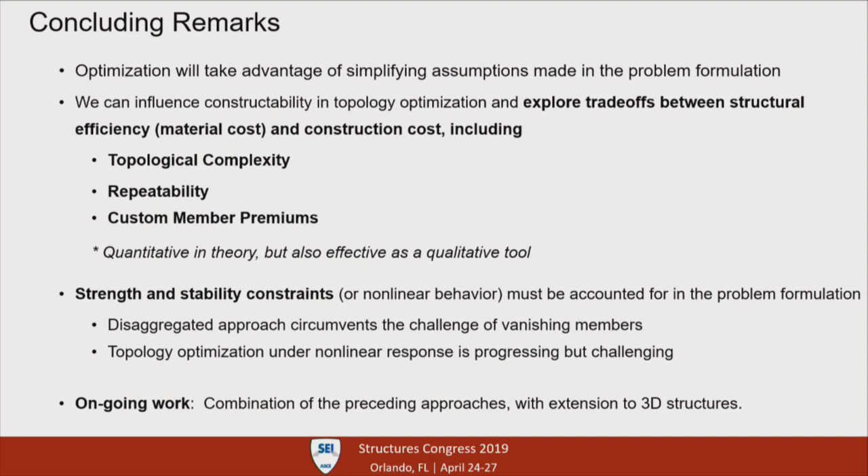Yes, we do have time for questions. We've done a lot of work with heaviside functions and continuum problems, and we use what's called continuation methods, slowly approaching an actual discrete heaviside function. So we have a lot of experience with that, and we found two things to be useful. One is this strategy of slowly approaching a real step function. The second is actually manipulating your optimization algorithm. We use a very common optimizer called method of moving asymptotes, which the topology optimization community uses quite a bit.

Move limits, everything is set up not knowing that there's this really strict nonlinear function. So if we get in there and adjust some of those move limits, we actually get much nicer performance, even using a constant, pretty close to discrete step function—so it's a little bit of slowly increasing it to approach it. That's one strategy. The other is to get inside the optimizer and really force it to take smaller steps, because whenever you do a linear approximation for a gradient, it's only valid over a certain distance, and when you have these sharp things, that distance becomes very small. So actually putting that in the optimizer—but yeah, great point. It didn't show up as much in these problems, probably because they're very simple. They're simple elastic problems, and these cost functions are not very complex. But yeah, good question.

Do we have other questions?

I'm going to add a comment that you're asking a computer to find an optimal structure, and the computer is trying to trick you all the time. So if you pose your instructions wrong, you're going to get funny results. Yeah, always—you should always go back and interrogate your results, understand why it tried to design what it did, and verify that that's correct.